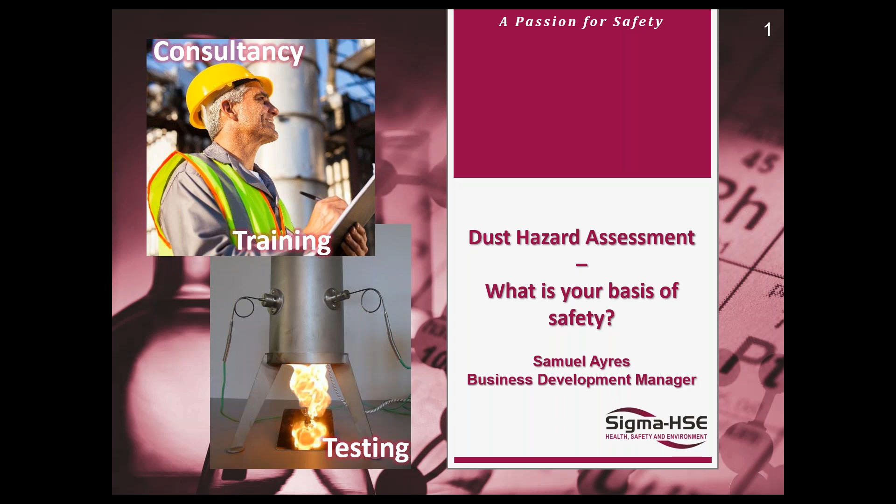Hello, and thank you for joining us here for this webinar today on dust hazard assessment and basic testing to see what your basis of safety is going to be. My name is Samuel Ayres, I'm the Business Development Manager for Sigma-HSE. I've been in the business for just over 2 years, and I work out of the UK.

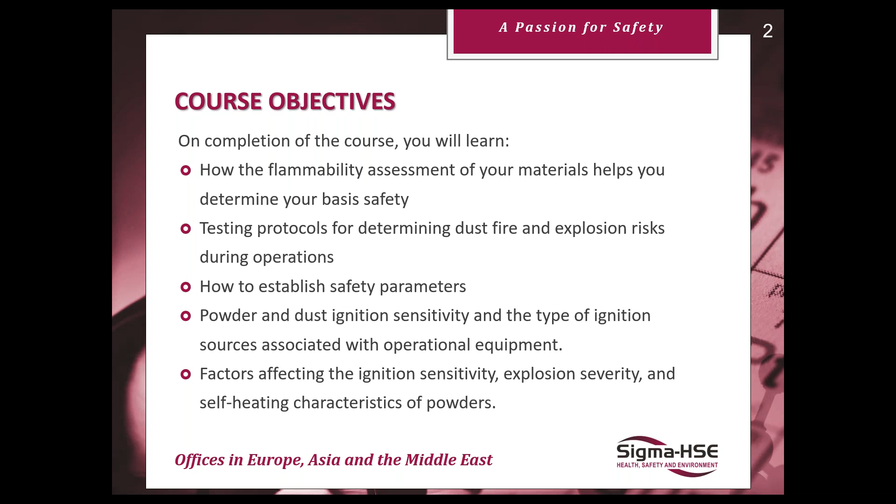So the course objectives, what are we going to be studying today? We'll be looking at how the flammability assessment of your materials helps you determine your basis of safety given a unit operation. We're going to define the testing protocols for determining dust, fire and explosion risks during unit operations, how to establish safety parameters, and look at powder and dust ignition sensitivity, the ignition sources associated with operational equipment, and the factors affecting ignition sensitivity, explosion severity, and the self-heating characteristics of powders.

So Sigma-HSE, what's our area of expertise? We bring together a global collaboration of companies providing our clients with process safety services and appropriate engineering solutions. We undertake laboratory testing for global customers, to ISO, ASTM, BSI and VDI international standards.

Our consultancy services cover process safety management implementation, industrial fire and explosion hazards, whether that's a dust hazard assessment, ATEX for our European customers, or DSEAR for our customers in the UK. We undertake electrostatic hazard assessments, hazard studies, process hazard analysis, functional safety such as SIL assessments, and bespoke training workshops, which can be done on site or remotely.

Laboratory testing focuses on powder and fire explosion properties, gas and vapor properties, electrostatic properties of your materials, and chemical reaction hazards. This includes calorimetry, ARC, ARSST, Carius tube, and DSC testing to help you determine the pressure release from exothermic reactions and onset temperatures. We also conduct regulatory testing.

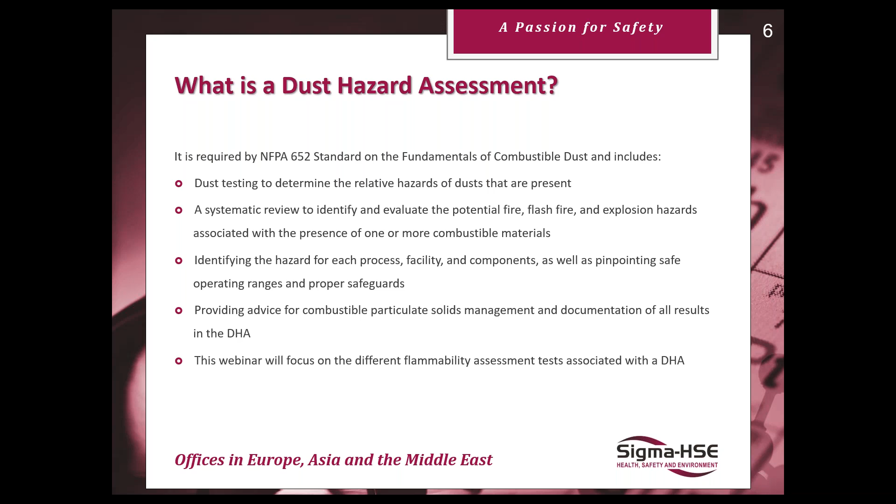So this webinar will be talking about testing with regards to explosive and flammable materials. So what happens when things don't go too well? As many of you are aware, in the Imperial Sugar disaster, 14 died, unfortunately, due to an explosion, a secondary explosion due to sugar buildup. More recently, the Tuas explosion, which not everyone may be aware of, happened in Singapore this year. This was an explosion in a mixer caused by powdered potato starch, unfortunately.

So, the conditions for a dust explosion: first off, the dust or powders used at a site must be flammable, combustible, and airborne to form a cloud. The concentration of the dust must be within explosible limits. Particle size distribution should be capable of propagating a flame. The atmosphere must have enough oxygen to support the combustion. There must also be a sufficiently energetic source to ignite it.

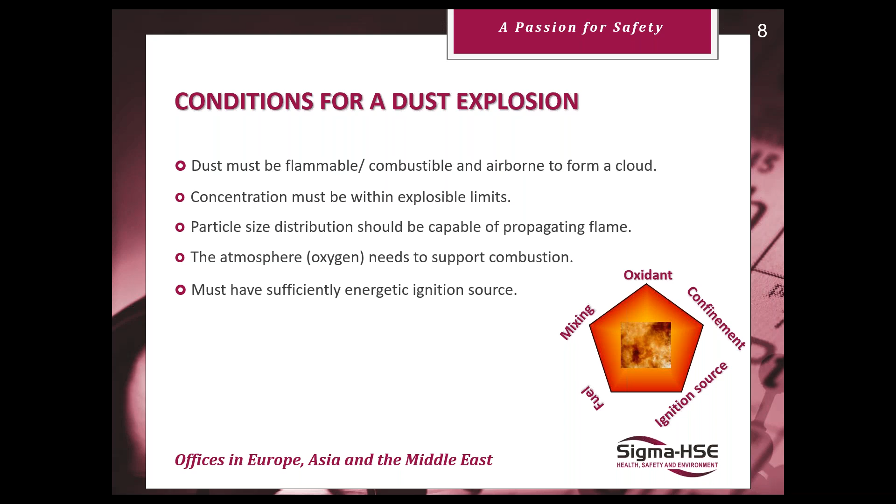So how can testing help you determine your basis of safety? There are three ways to determine it: explosion prevention, to stop an explosion ever happening; avoidance of ignition sources; and as a last resort, explosion protection. Ideally you'd like to stop the explosion happening. If you can't stop the fuel being there, you need to make sure you don't ignite it. But if you can't rule out all the ignition sources, then you must protect it to stop it propagating elsewhere and keep it contained.

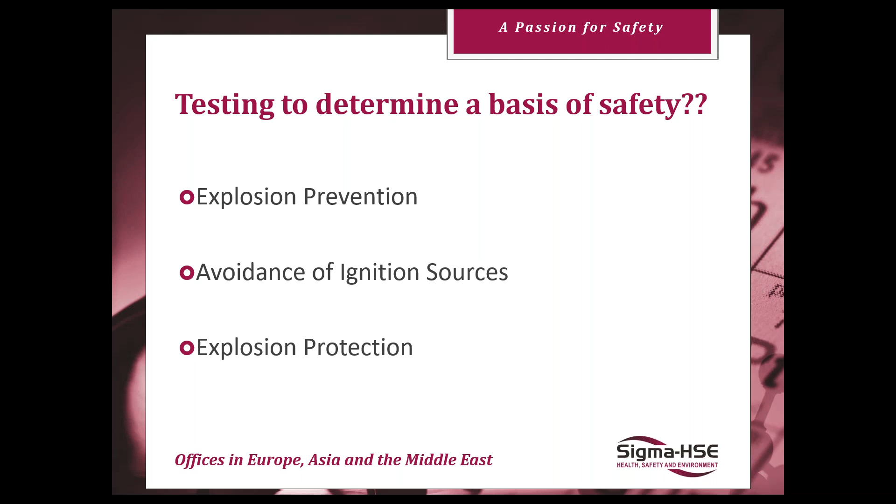So we're going to look now into the testing of your dust and powders which are associated with the explosion prevention part of the basis of safety. First of all, it's removing the fuel.

This isn't always possible in most operations. You may have flammable powders and dusts, and getting rid of them just isn't going to happen. But for gases and vapors, you can work outside the flammable ranges - below the LEL, the lower explosible limit, or above the upper explosible limit. You can remove the oxidant, by nitrogen purging or argon purging, but that requires further data to help you achieve that, which we're going to go into shortly.

You could remove all the ignition sources to stop an explosion happening, but sometimes this isn't feasible. There's always ignition sources, especially static or hot surfaces, which you can't always mitigate. Process control - but again, this isn't always reliable.

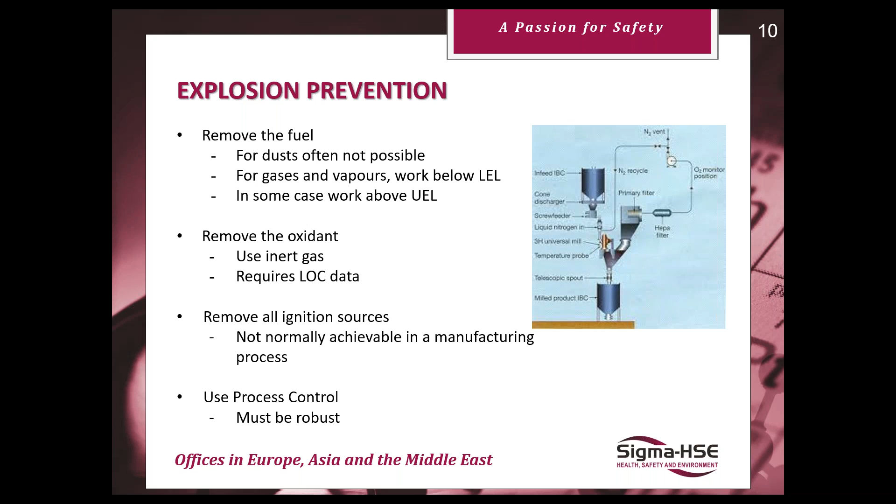So first of all, what tests can we do to determine whether your material is flammable? It's called the go, no-go screening test, also known as a Group AB or dust combustibility test. This is a picture of our piece of equipment - it's called a 20-litre sphere. This test will help us determine whether your dust is flammable or not.

We will use 10 kilojoule igniters, and in that pressurized container we'll create a vacuum and try to ignite the dust. If it goes, then obviously we know the powder is explosive, but that's pretty much all the data we have at this stage - there is further testing you need to go on to help with your DHA. If it's not combustible, then that's great - you've not got a combustible dust, and you can use it as such.

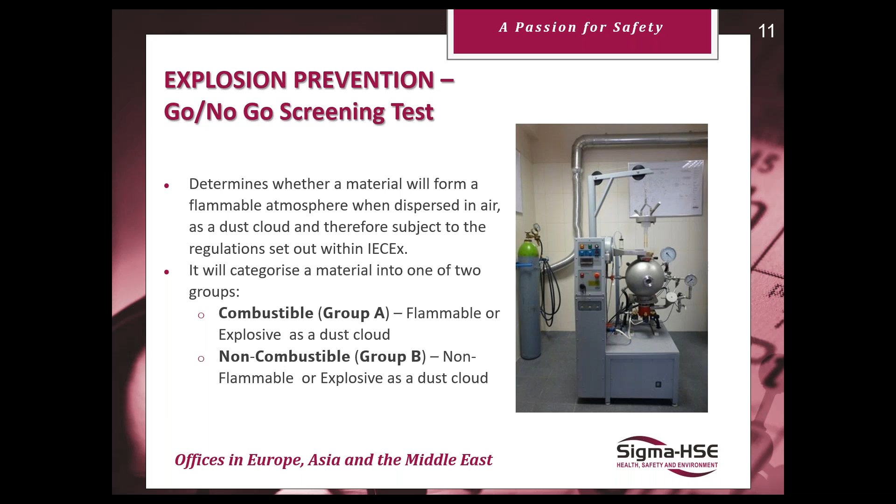So we briefly talked about the explosion prevention limiting oxygen concentration test. As everyone knows, oxygen is required to create a fire and therefore create an explosion. If you removed all the oxygen and there is a completely inert atmosphere, that would help you, but that's expensive, having constant purging.

What about reducing the oxygen level only a certain amount with the help of purging, reducing it to a level where there's not enough oxygen to create a flame? So in this test, what we'll do in that 20-litre sphere is slowly decrease the amount of oxygen until we find that sweet spot where there's just not enough oxygen for the explosion to happen.

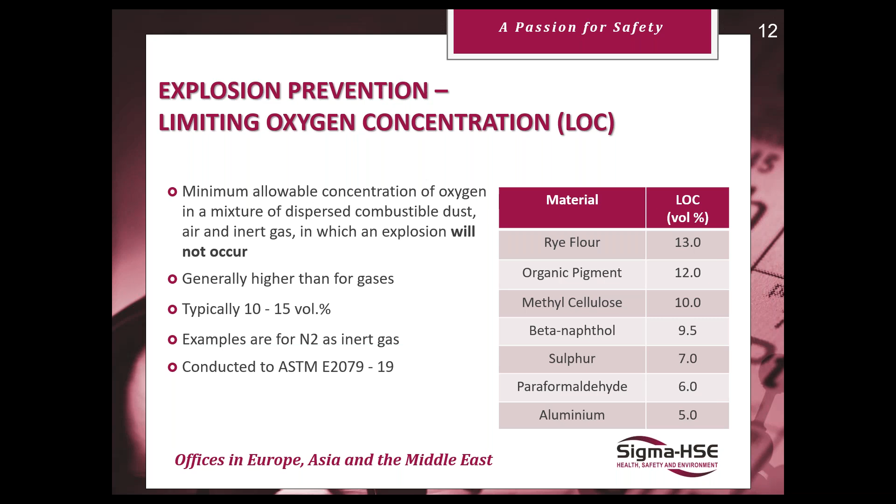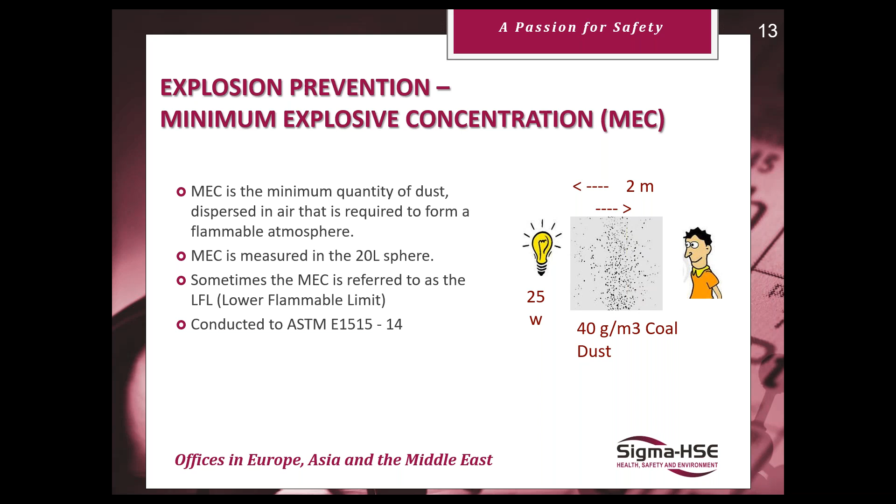So those three tests there - the go, no-go test, the LOC, and the MEC - can help you use explosion prevention as your basis of safety, providing it's either not a flammable substance, or you're working outside its flammable range, whether that's by its concentration or by the oxygen level, adjusting the oxygen level to make it into a safe zone.

The next stage, part 2, is the avoidance of ignition sources as your basis of safety. But for that to be effective, you need to know how sensitive your dusts are to different sources of ignition, to make sure you're working outside the sensitive range. So we'll highlight some of the potential sources of ignition - not all of them common, but ones that could ignite and are big enough to ignite your fuel.

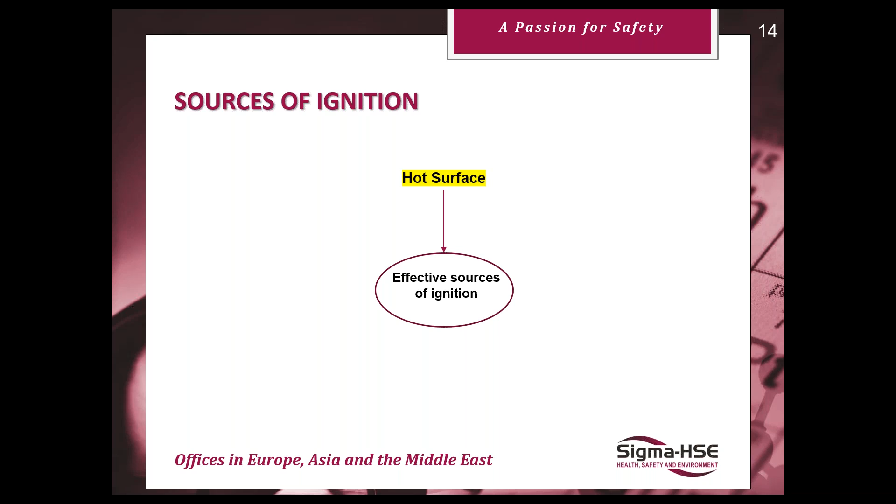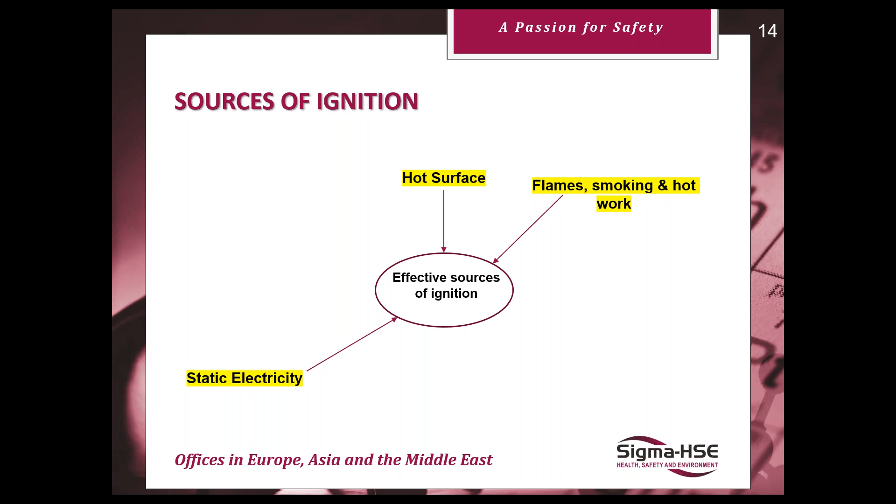Hot surface, that's a key one, hard to always avoid in the workplace. Flame, smoking, hot work again is difficult to always avoid. Static electricity is a present threat that can be hard to mitigate at times. Electrical apparatus, mechanical friction and thermite sparks, lightning - not all of them overly common - but exothermic reactions and spontaneous combustion. This one doesn't get too much attention, but it's definitely something to consider, especially if you're doing a lot of bulk reactions or any calorimetry work.

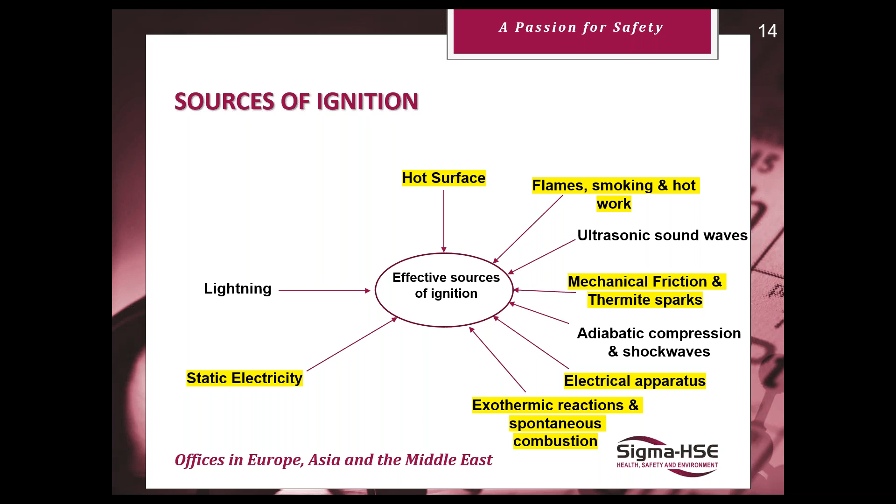Ultrasonic waves, adiabatic compression and shock waves, stray electric currents within installations, ionizing radiation - again we go a bit further down the risk. I've highlighted in yellow the ones of the 7 which are most likely to be present in your workplace at one time.

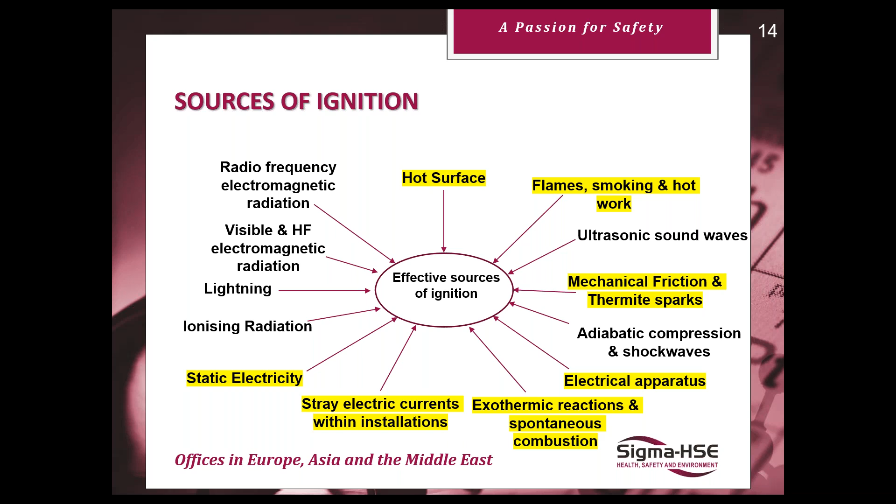This is probably one of the most common tests done throughout the world to help people determine how sensitive their dust is to electrostatic sparking.

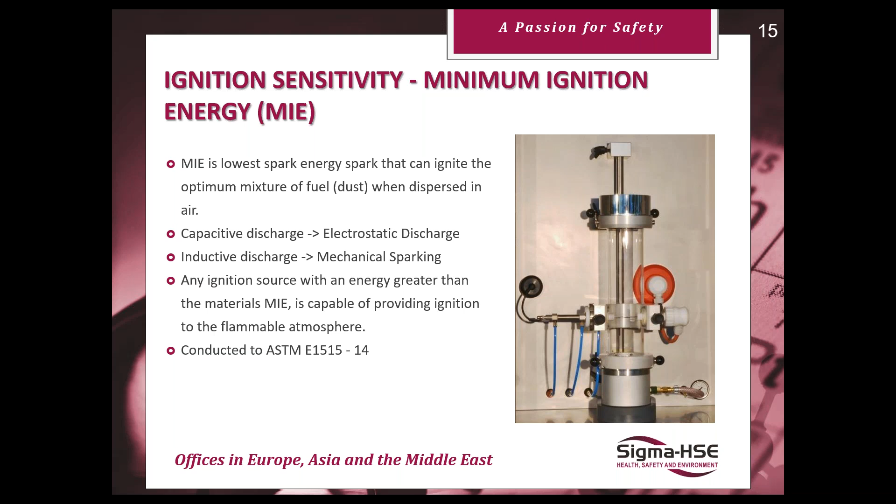I do have a video of this one shortly. I checked it, it was working before I started this presentation, so bear with me. I'd advise turning the sound down a little, because some of these videos can be a bit loud. Let me just go across to it now. Yep, it is going to work - we'll try to turn it down on my end as well.

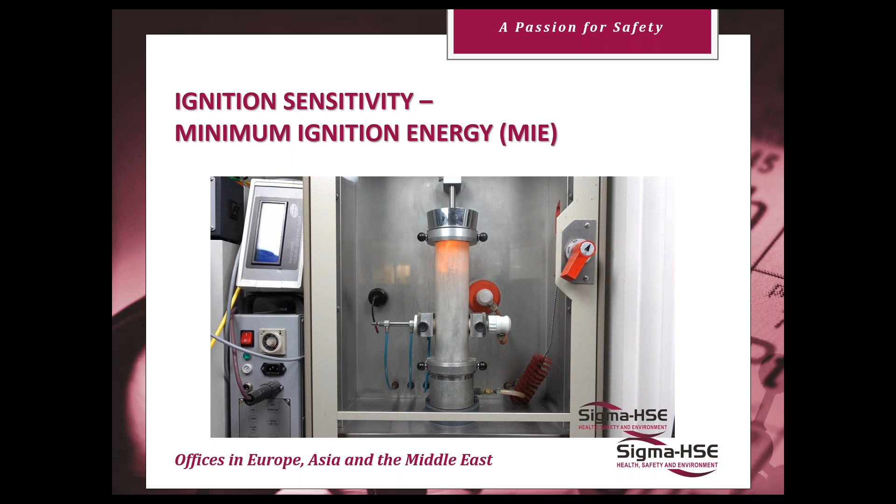Okay, here we go, so this is our tube - that's the simulator, that's what we're trying to achieve, to determine what level of energy will cause ignition. Some different materials can ignite at a really low energy and be really dangerous. I've got a table next to show some key materials and what energy level is suitable to ignite them.

Cocoa is quite high, 100 to 300 millijoules. GRP dust, 30 to 100. Sugar is a key one, 10 to 30 millijoules. A human can sometimes, when touching a piece of metal with a bit of static, discharge between 30 and 40 millijoules, which can potentially ignite anything below about 30 millijoules, such as aluminium or APIs in the pharmaceutical industry. So that's the MIE test - in a nutshell, it's testing electrostatic sparking and what level of spark will ignite your dust.

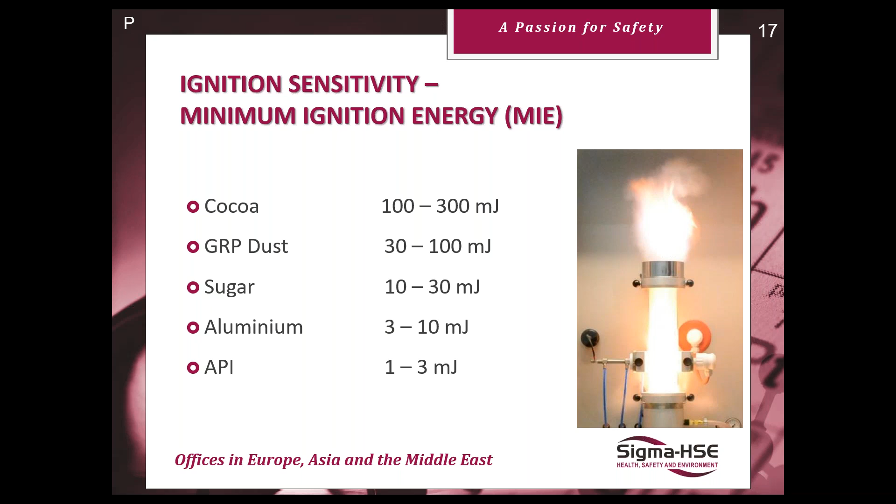And for this test, we will use, to give you a safety factor, it's always 2/3 of the value that we achieve. So if we see a flame at 300 and we don't see a flame at 295, then we'll give you the figure of 300 degrees Celsius as the onset, but the safety factor would always be 2/3 of that. So it would be 200 degrees Celsius as your safe zone. And that's what we would advise you when you're selecting equipment, that it would always be 2/3 of the MIT value.

I will add though that this temperature does coincide with the next test I'll be talking about, so I will refer back to equipment selection in a second. But I've got a video of this test as well.

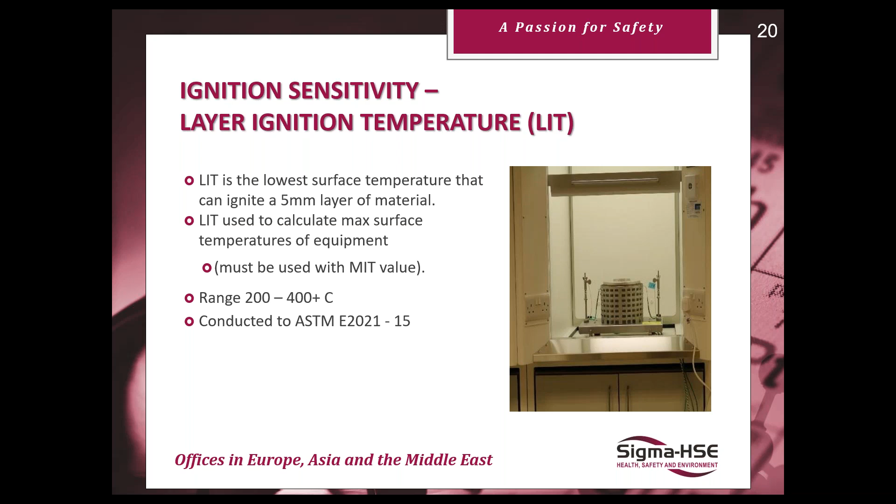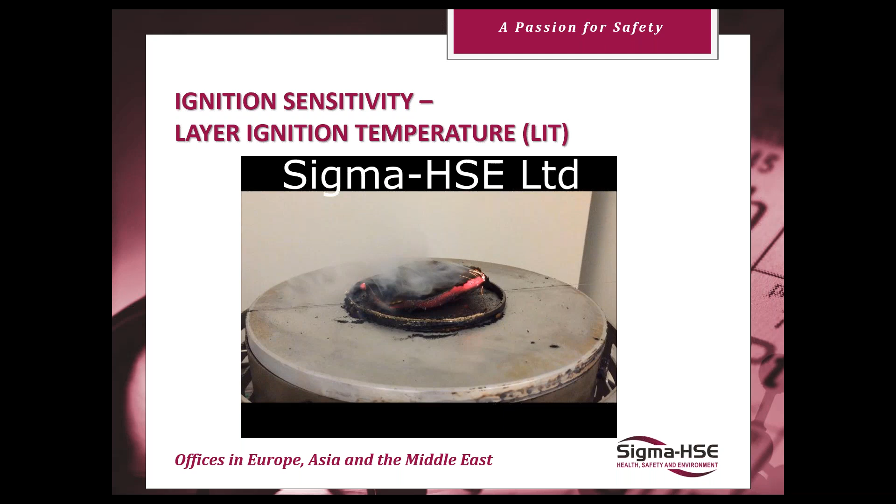So yeah, this is we're just trying to determine what temperature this sort of thing happens, or if it bursts into flames. A lot of different materials do different things. Some just glow, some smoke, some go into flames. And this is what we're looking for to help you determine your equipment selection.

So that was explosion prevention and the avoidance of ignition sources, and what tests help you determine if your basis of safety is going to be suitable. The last one is explosion protection. So these are the tests which are going to help you determine what containment systems are going to be suitable, what LEV systems will be, what size blast panels or blast vents or pressure relief valves you're going to need.

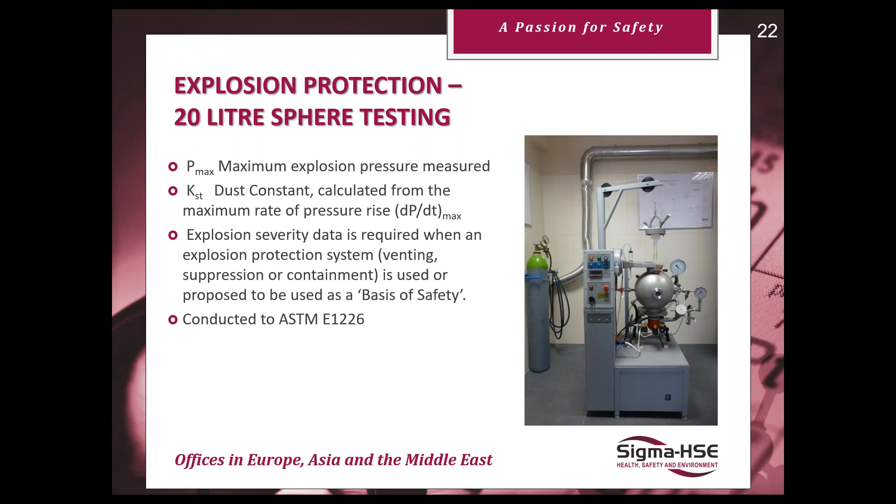So I'll just put all these up and I'll talk through them separately. So this is again the 20-litre sphere. This is the same piece of equipment that we do the go-no-go minimum ignition concentration and limited oxygen concentration testing, but we just use it slightly differently this time.

So the aim of this test is to determine the maximum pressure that is detected when the explosion happens, and the rate, the calculated maximum pressure rise, so dP over dt. How quickly is that pressure generated? We'll do this test at multiple times, varying the concentration of the dust and looking for its worst case scenario. So with this data, it will help you determine those explosion protection items, as I previously mentioned.

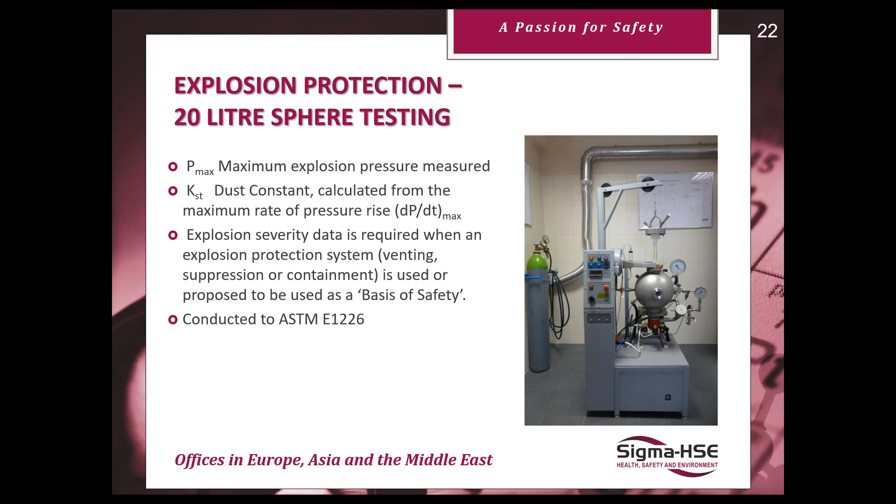So at the end of this, you'll get given what's called the dust class, St class. It's ST0, 1, 2, or 3. So I'll just go across to the next slide.

So ST0, there was just no explosion. There was no pressure detected. An example of that is silica, which is obviously inert.

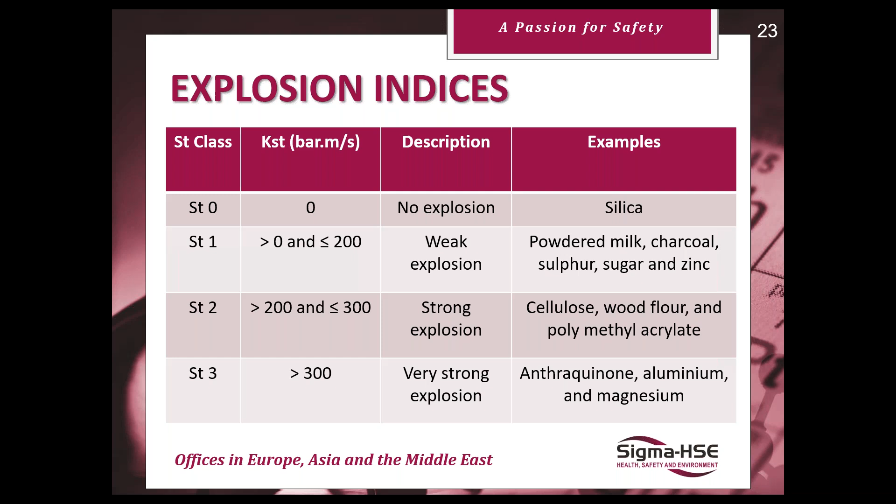And then ST1, 2, and 3 increasing in severity. Please take note that sugar is an ST1 dust, but obviously from the Imperial Sugar disaster back in 2008, just because it's classed as a weak explosion doesn't mean it is not dangerous. But a lot of the APIs, and aluminium, magnesium, and those metals, are all very strong ST3 plus explosions.

So something else which hasn't been considered yet, particle size. The general rule of thumb is the smaller the particle size, the greater the surface area. There's more surface area for a reaction to take place.

But the effect of the particle size can't be calculated in any way for how that's going to affect your tests. Say, for example, you've done a load of tests on a material that was 500 microns, which in terms of particle size is quite a big particle. But you actually found out through testing that the particle size you're actually using is more like 63 microns or 100 microns. The data that was generated on 500 microns is more than likely going to be very different to what you're actually using, so your basis of safety may not be the right one.

So you may need to possibly look at retesting at a more representative sample of what you're actually using on site. But generally speaking, as the surface area increases, so as particle size decreases, the explosion violence, explosion severity increases, but the energy required for ignition decreases. So it becomes more dangerous, and a lower millijoule spark or a lower temperature would ignite it. So that's why it's extremely important to potentially retest at different particle sizes if you believe you are using different particle sizes than in the data you've already got.

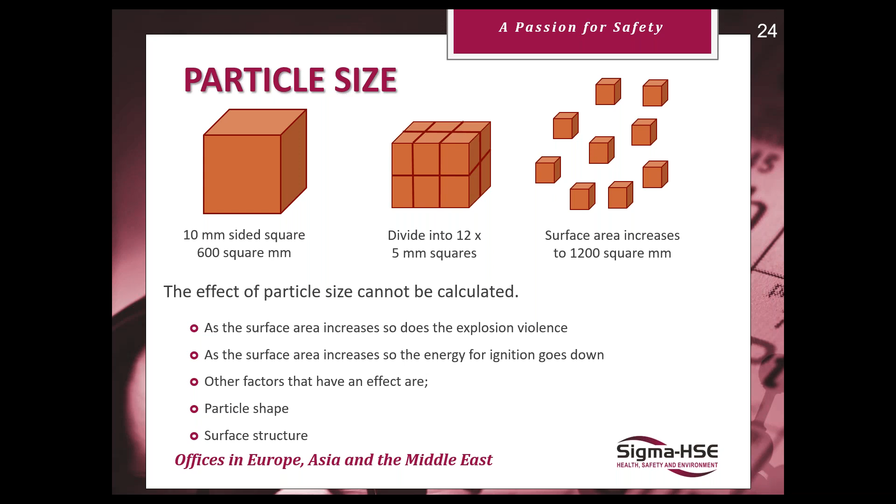But generally, if you're using things at different temperatures or different particle sizes, it may be worth retesting.

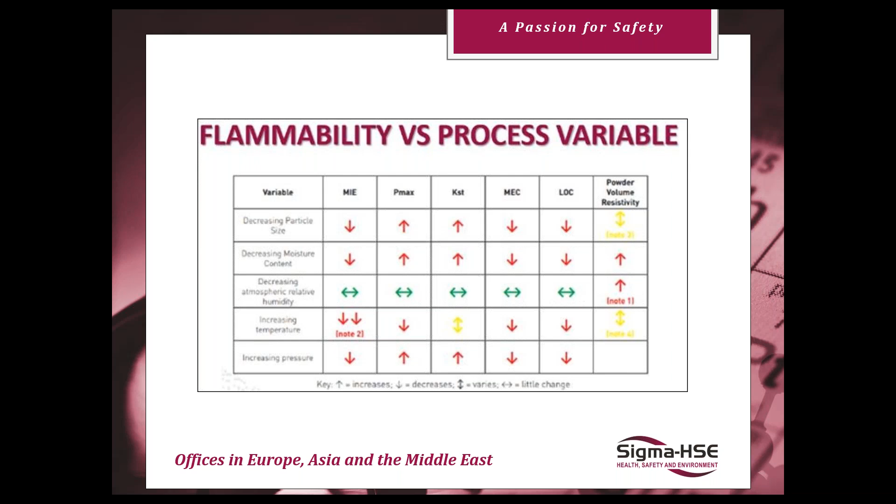Right, so moving on. So that was, in essence, how testing helps you do your basis of safety. But you've always got to remember that a basis of safety has got to have a primary and secondary source. So if your primary source was explosion prevention, because you're going to work outside the flammable limits for example, then explosion protection could be your secondary basis of safety. So you'd still look to always have a secondary just in case your primary failed.

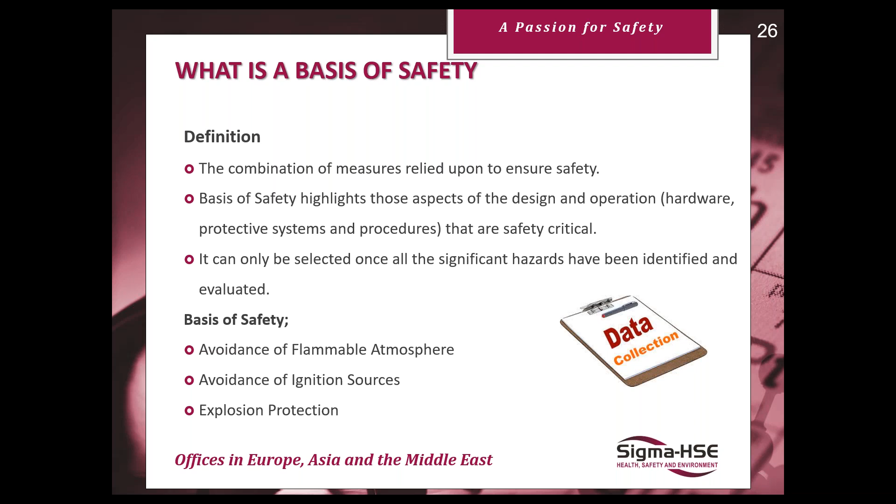Can you eliminate ignition sources? This basis of safety is not always possible, because sometimes you can't always even identify all the ones on site without doing your DHA. So you would need to do a DHA to help you identify them. And then can they be overcome? Sometimes, but not always, especially electrostatic and sometimes hot temperatures. Those are the two which can't always easily be overcome, because you may need to be operating at a high temperature for your reaction to be efficient.

And again, one important thing to remember: normal and abnormal conditions both need to be considered. What happens outside the norm?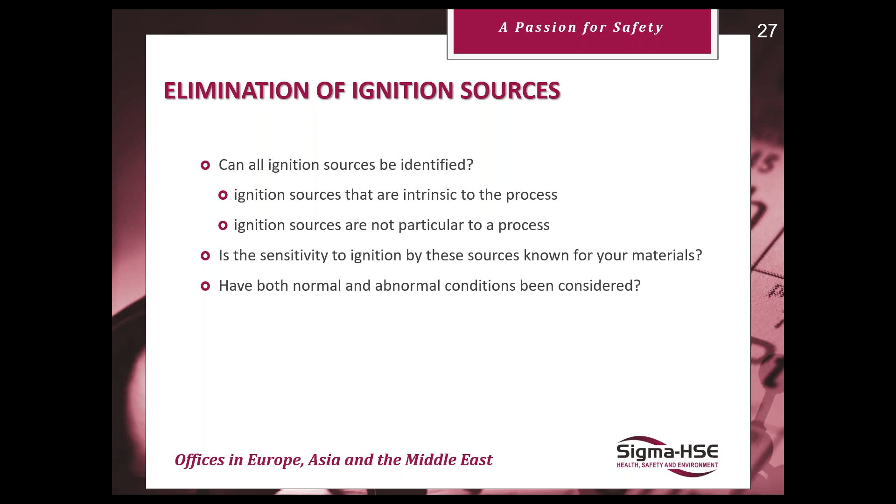Equipment selection is obviously for hazardous zones - 0, 1 and 2 for your gases and vapors, 20, 21 and 22 for your dusts. And also we talked about temperature class of equipment. So the maximum permissible surface temperature of different equipment is extremely important, especially if you've now got the data from the MIT and LIT tests.

So if you've got, say, an item that's allowed to go up to 300 degrees - that's the maximum permissible - but your safety factor says you need one that goes no higher than 150, then you've got an issue now.

That's why testing helps you determine whether equipment is appropriate or not. Sometimes instead of going for one of the more expensive pieces of equipment, which has one of the lowest maximum permissible surface temperatures, if everything you're using on site has a relatively high MIT and LIT value, that could be quite ineffective to go that route. So testing can help you make sure you've got the right piece of equipment. That's goal one of testing for those two tests. But it also could help you save money.

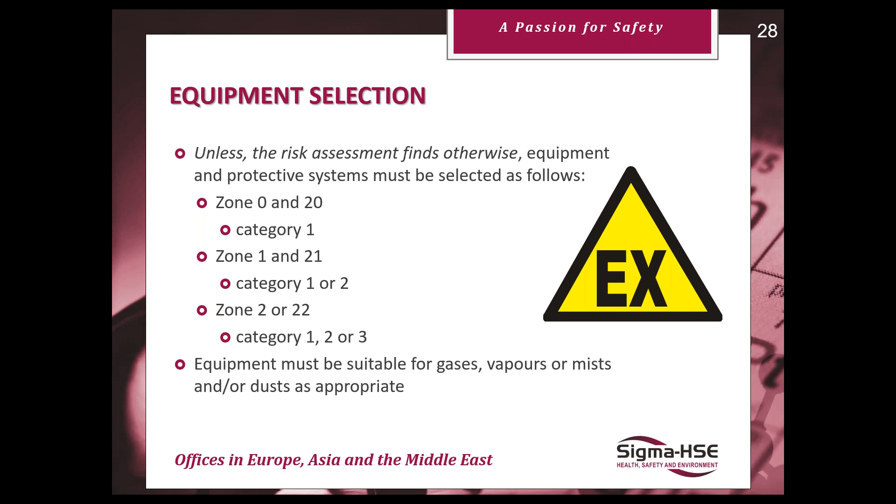So for explosion protection, we've talked about the Kmax, Pmax, and KST values. There are three types generally of explosion protection: containment, venting, or suppression, either from an inert gas. But all of these measures require proper isolation to stop the flame or explosion from propagating to different areas of the factory.

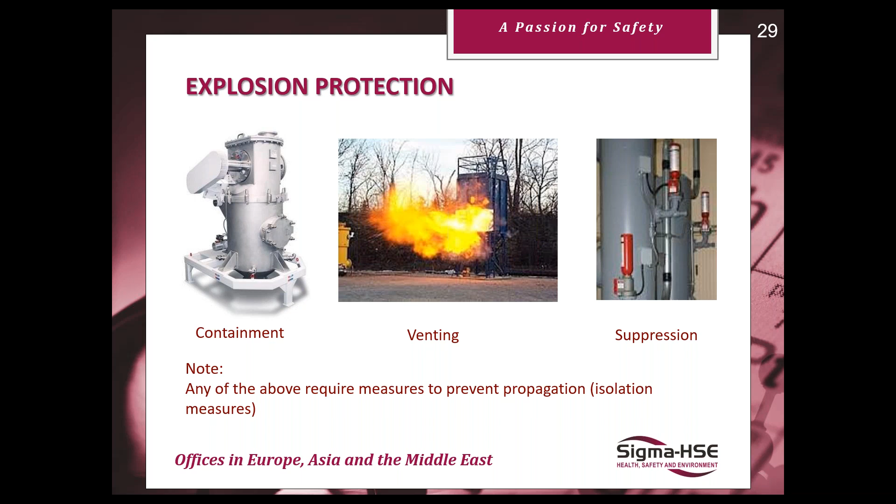So for containment, it must be able to withstand the maximum pressure that is expected and maintain that strength over its lifetime. That's why the 20 litre KST and Pmax test is extremely important. If it can only withstand a lot less than the maximum pressure detected in the 20 litre test, then it's not going to be suitable.

And again, it requires effective isolation from fast closing valves and rotary valves.

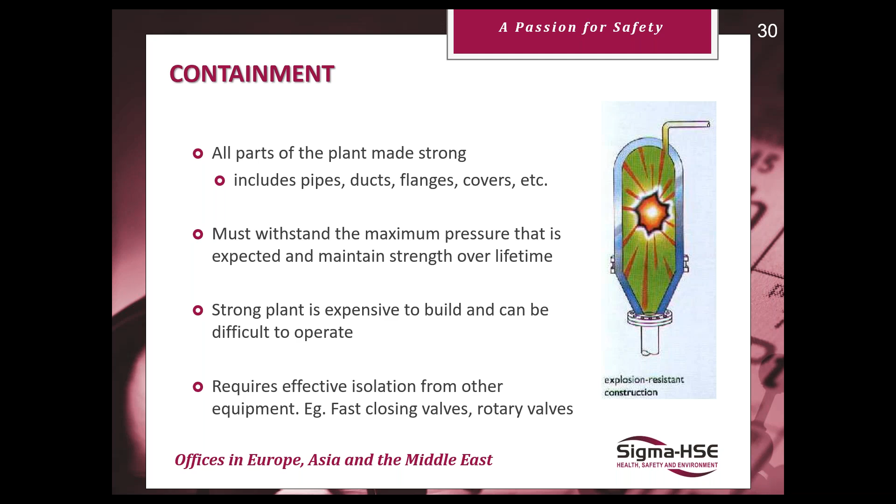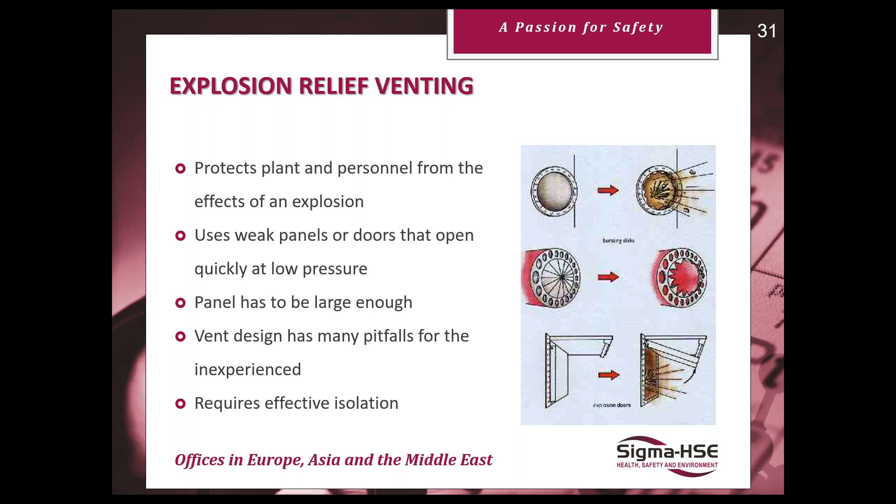Relief venting - this is very common, you come across it a lot, whether it's doors, bursting discs, panels, or pressure relief valves. Again, they have to be suitable so that they will vent enough pressure safely. The panel has to be large enough, and it requires effective isolation. But that's what the 20 litre sphere will help you generate enough data to help you, or your designer, select the right venting option.

Explosion suppression is achieved by having a detection system in place which will sense an explosion or flame happening - it would be a CO detector - and instantly inject a suppression agent, like nitrogen or argon, quickly enough into that area to suppress the flame. These can be quite expensive, and they need to be maintained and tested efficiently. And again, this does require effective isolation as well.

So here's a brief diagram of routes for testing. Starting from the top: can the material form a flammable atmosphere under a foreseeable condition? If it can't, if you've tested it and it just won't ignite, you can go down the avoidance of flammable atmosphere route. Again, then - is the material flammable? If not, avoidance of flammable atmosphere. And how sensitive - you need to determine how sensitive, how severe the explosion could be, and what those flammable limits are. Those are the tests down the left-hand side that help you determine those questions in the middle. And down the right-hand side, it shows you what route to follow for the basis of safety you're going to choose.

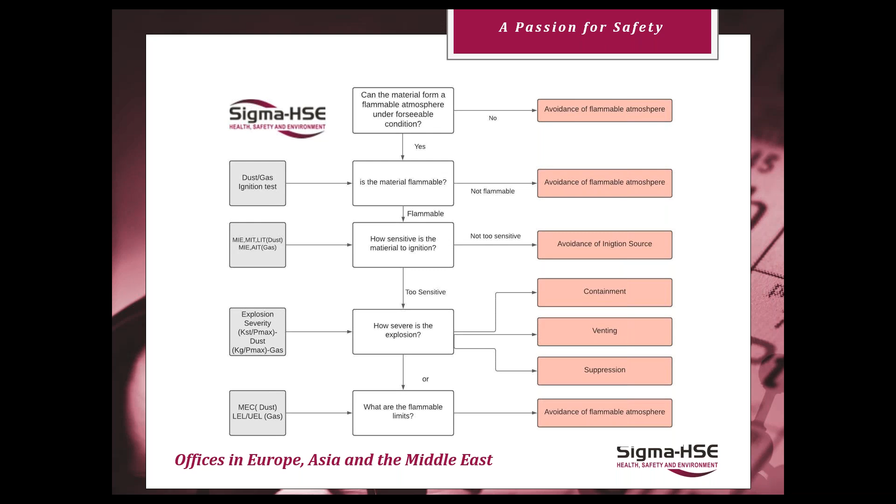So why choose Sigma-HSE for testing? We have global laboratories, able to achieve a turnaround time of 5 to 7 days from receiving the sample. Our technicians from around the globe have decades of experience. We're ISO accredited, that's ISO 17025. And we currently have clients in over 30 countries, including the USA and Canada.